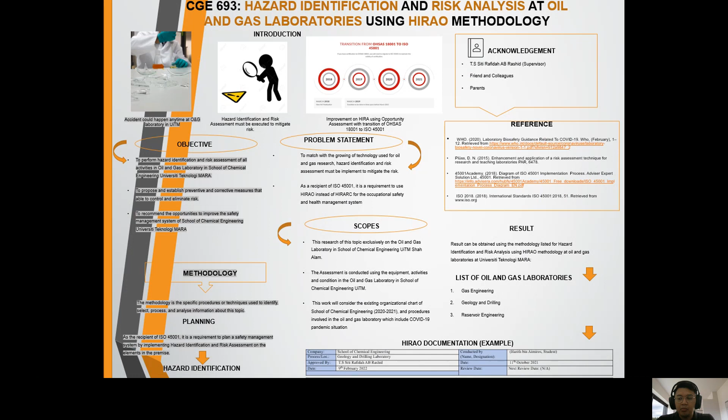This is the list of references that I will be using for my hazard identification and risk analysis at Oil and Gas Laboratory using HIRAO methodology.

Next, we will be moving on to the methodology of this research project. What is methodology? The methodology is a specific procedure or technique used to identify, select, process, and analyze information about this topic, which is the hazard identification and risk analysis at oil and gas laboratories using HIRAO methodology.

What does the methodology conclude in the HIRAO methodology? First is planning. As the recipient of the Occupational Safety and Health Standard ISO 45001 in 2018, it is a requirement to plan a safety management system by implementing hazard identification and risk assessment on the elements in the premise. This is the content of Act 6 in the Occupational Safety and Health standard.

ISO 45001 in 2018. In the planning, there are 3 steps: first, hazard identification; next, risk assessment; and last but not least, opportunity assessment.

First, I will be explaining the hazard identification. For hazard identification, it is a requirement to state whether the work activity is routine, non-routine, or emergency.

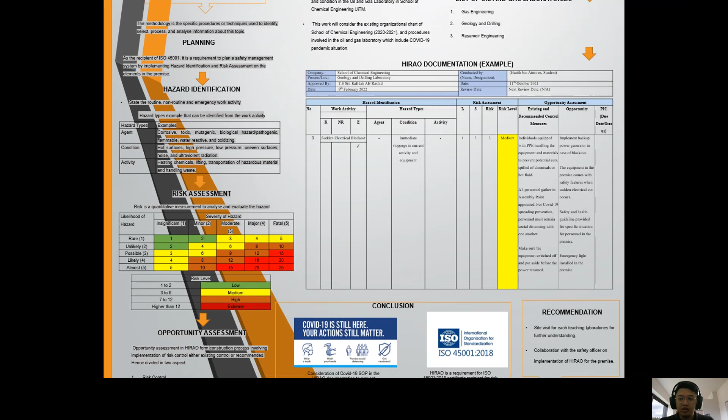Thus, for the opportunity assessment in HIRAO form, construction process involves implementation of risk control, either existing control or recommended control. Hence, opportunity assessment can be divided into two aspects: first is risk control, and second, opportunity assessment for overall improvement of the safety and health management system in the premise.

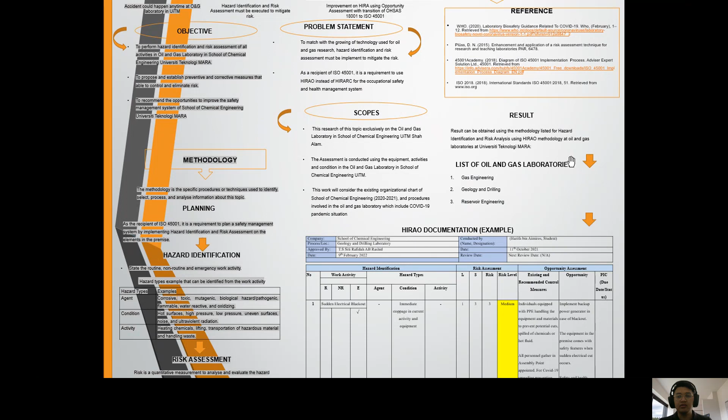Using the methodology for this research project, the result can be obtained for hazard identification and risk analysis using HIRAO methodology at the oil and gas laboratories at Universiti Teknologi MARA.

In the School of Chemical Engineering, Universiti Teknologi MARA Shah Alam, there are 3 oil and gas teaching laboratories: first, gas engineering; second, geology and drilling laboratory; and last but not least, the reservoir engineering laboratory.

As for the result of the HIRAO documentation, the HIRAO form must normally be filled by the safety officer, but in my case, I will be conducting the HIRAO documentation process.

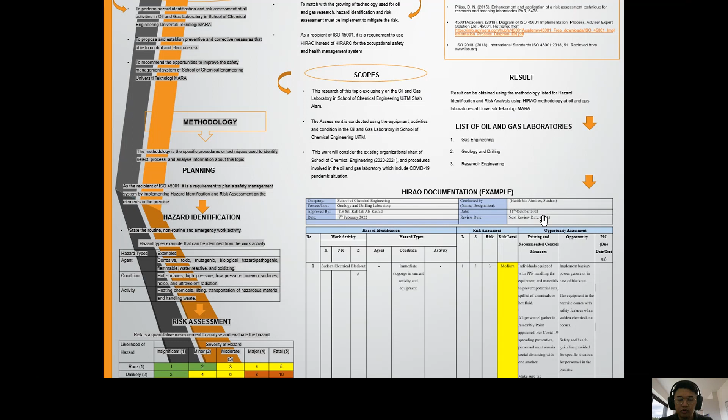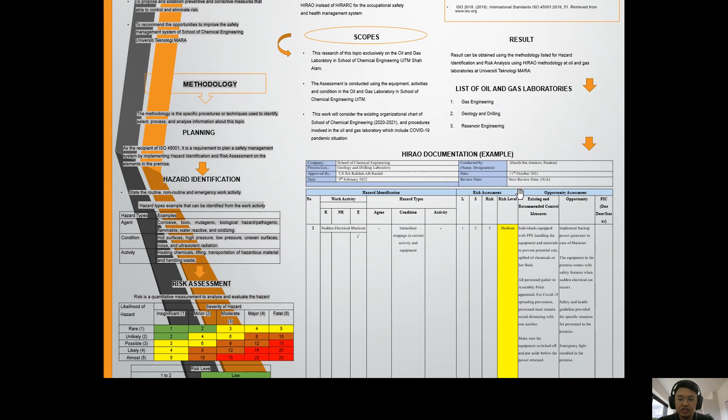At the top of the HIRAO form table is the information of the location, the person in charge, and the date the documentation was conducted.

As an example, from the top of the HIRAO form table is the name of the company, next the location where the HIRAO documentation process was conducted, and who the HIRAO documentation was approved by.

Next is who is conducting the HIRAO documentation process. For this example, it is me as a student conducting the HIRAO documentation based on the process involved in the geology and drilling laboratory.

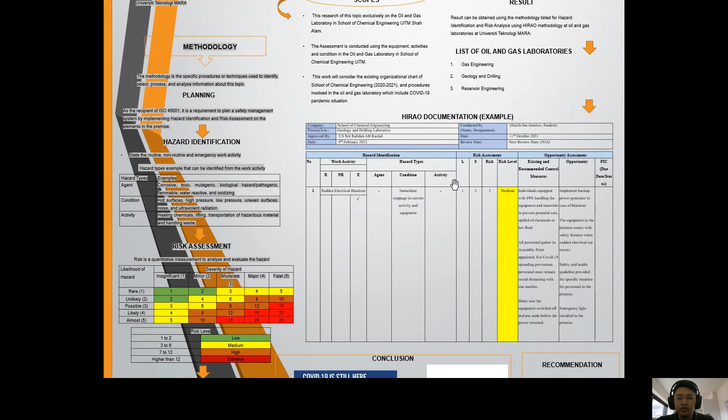We will now move on to the elements in the HIRAO documentation process. There are 3 elements associated with the HIRAO documentation process.

The first element is hazard identification. Second is the risk assessment, and last but not least, the opportunity assessment.

I will show how the HIRAO documentation process occurs. First, the work activity is listed.

As an example, a sudden electrical blackout happened in the geology and drilling laboratory. This can be considered an emergency because it is a non-routine activity in the premise.

Since it is neither a routine activity in the premise, the emergency box is ticked.

Next, the hazard type is identified based on the work activity, which is a sudden electrical blackout. The condition of hazard is the immediate stoppage in current activity and equipment.

After completing the filling of the hazard identification section, we will move on to the risk assessment process.

Since the sudden electrical blackout is an emergency, the likelihood number of this activity is 1.

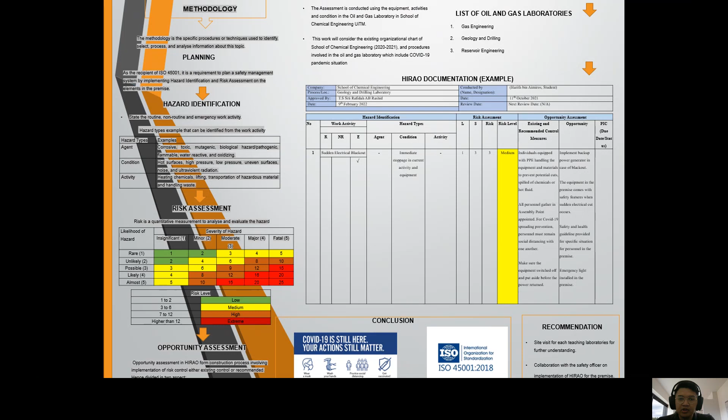After the HIRAO documentation filling form is completed, the form is then signed and reviewed by the person in charge. Hence, the record of the HIRAO documentation can be made for future reference and the next update.

As a conclusion of the result from the HIRAO methodology, consideration of COVID-19 SOP in the HIRAO documentation is important to prevent COVID-19 spreading between personnel in the premise.

This is to comply with the regulations set by the World Health Organization and Kementerian Kesihatan Malaysia.

Last but not least, HIRAO is a requirement for the recipient for Occupational Safety and Health ISO 45001:2018 standard.

Last but not least, for the recommendation for my final year project, a site visit for each teaching laboratory is recommended to increase the understanding of all elements in the premise.

And last but not least, collaboration with the safety officer on implementation of HIRAO documentation in the premise.